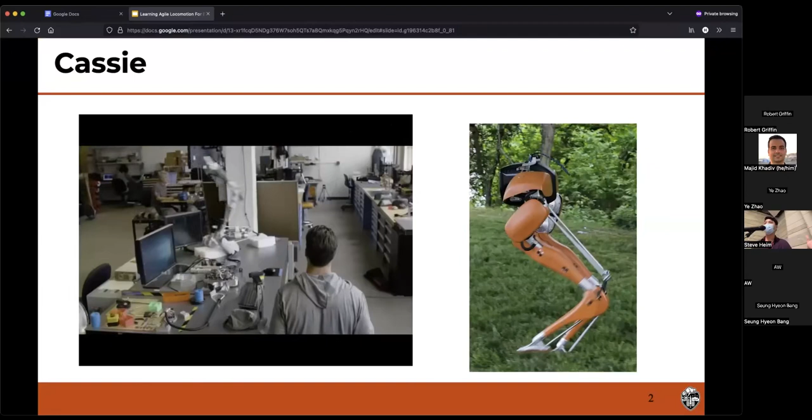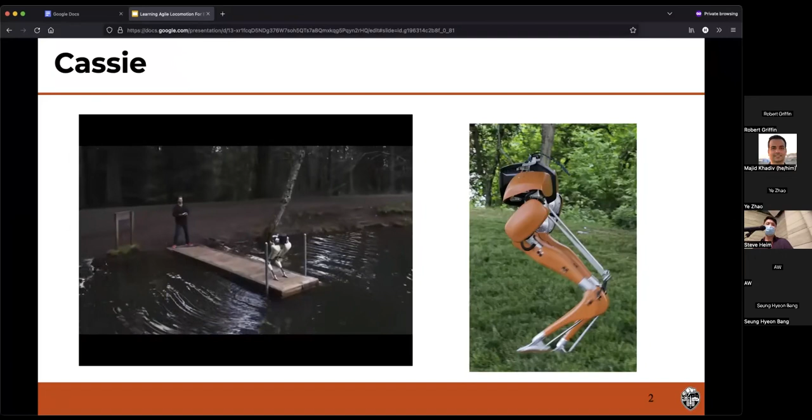Just to provide some context, we're primarily focused on the robot Cassie. It's actually the only robot that we have right now, which is mostly just a pelvis and 2 legs, weighs around 30 kilos, 10 DOFs. We have 5 motors in each of the legs, with just 1 degree of freedom at the toe, and then also 2 springs, 1 at the knee, which is actually hidden under the shell here, and then 1 at the tarsus.

So one of the first questions we might ask is why use reinforcement learning at all, since it's definitely not needed. Cassie can walk and walk pretty well already without learning, using all the model-based and MPC stuff that people have been using for a long time. Using just reduced models, some planning, some optimization, Cassie is perfectly fine walking up these small steps and walking around pretty robustly.

But we like to say that reinforcement learning is really good at getting into the corners of the dynamics. These data-driven methods, through tons and tons of experience, we think can produce much more easily really agile and much more dynamic behaviors. So like a little sneak peek here, Cassie's running at just under 4 meters a second here. We think we'd struggle a lot to get this kind of behavior through model-based methods alone.

So how can we use reinforcement learning? As Zhaoming talked about earlier, we've kind of all seen this general loop of RL, where we have some agent, which is some neural network policy that takes in a state and produces some action that it takes into an environment, and the environment spits back out some reward that tells you how good you're doing, and also a new state, and you keep going back into this loop over and over again. By collecting all of this data, the policy will magically figure out how to produce better actions that get higher reward.

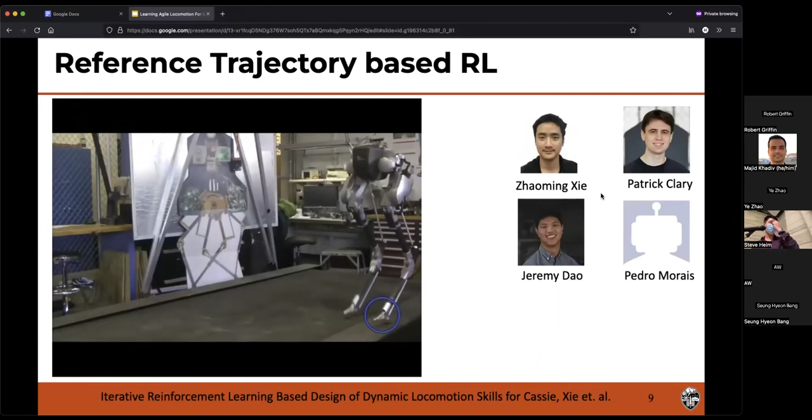So yeah, some of our first work, John already talked about a little bit this today. It was basically first following this setup where a reward function is just to basically at each time step match the corresponding position, full joint position, of the reference trajectory.

And we're actually able to get things to work pretty well. And even though we only have one trajectory for walking at a certain speed, we can actually generalize to walking at different speeds just by sort of stretching or shrinking this trajectory down, which basically means just literally translating the center of mass motion. And so of course when we do this, the trajectory no longer becomes dynamically feasible at all, but that's fine. Even though the feet are kind of sliding along the ground, it's a good enough learning signal that the policy can kind of fill in the gaps, which is another really great benefit of these data-driven methods.

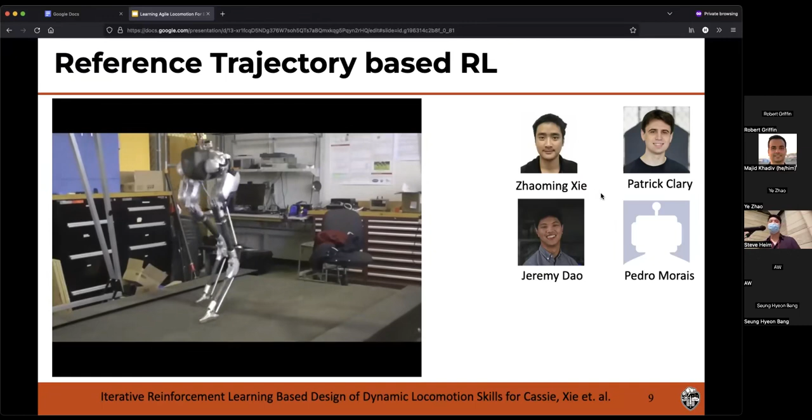And the reward is we basically want to track this reference trajectory. And we kind of take this iterative design approach where you just train a policy, see how it looks. Things are a little funky, so we add some heuristics to make it a little better.

So for example, we first trained a policy to just match the reference trajectory. We found that things are kind of a little shaky, not so great. So we add some heuristics to minimize the pelvis rotational velocity, minimize joint accelerations. And then we found that, okay, that helps, but then now our policy is kind of a little stompy and it makes really aggressive motions. So we had another heuristic to penalize the applied foot force, and then that works.

And then we find that when we do that, the feet don't lift up quite as much anymore, and so now it becomes less robust. So we can add in another heuristic that asks the feet to lift above some minimum height. So this is one of the not so great parts of RL - you're not really always sure what you're going to get. So you kind of have to rely on a bunch of design, but we'll get to possibly solving some of that as we go down.

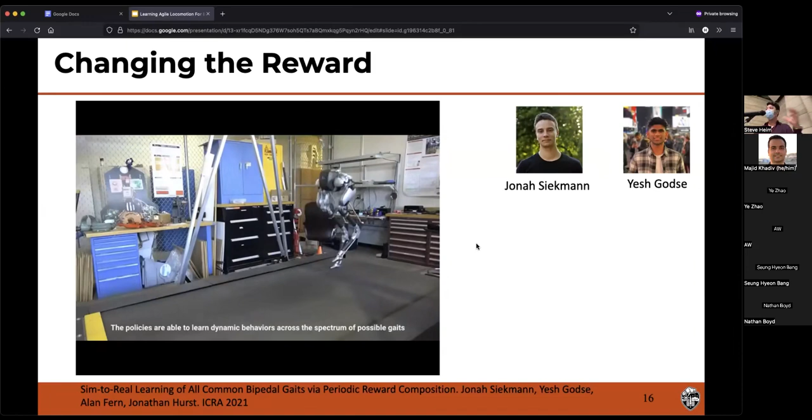So things like the ratio between swing and stance for each foot, stepping frequency, the phase offset between the left and right foot - by just changing all these continuous parameters, we can on the fly command any bipedal gait as well.

You'll see here, Jonah in the background is holding a controller, and on the controller there are some knobs that we use to change these parameters. So we can smoothly transition from walking to hopping to these kind of galloping behaviors.

So now we've changed our reward to no longer be reliant on reference trajectory information. We now have this generic periodic reward that can describe any bipedal gait, based on the timing of rewarding swing or stance for each foot. So we're no longer restricted to just training on walking at different speeds.

We can now train policies that do all sorts of bipedal gaits. Next we looked at changing the task we're training over. Previously all our policies were conditioned on speed, asking Cassie to match some speed like 1 meter a second. But then we were interested in footsteps, so we can navigate difficult terrain and step over gaps. This uses the same framework, but adds an extra reward component that rewards the policy for matching a desired footstep location.

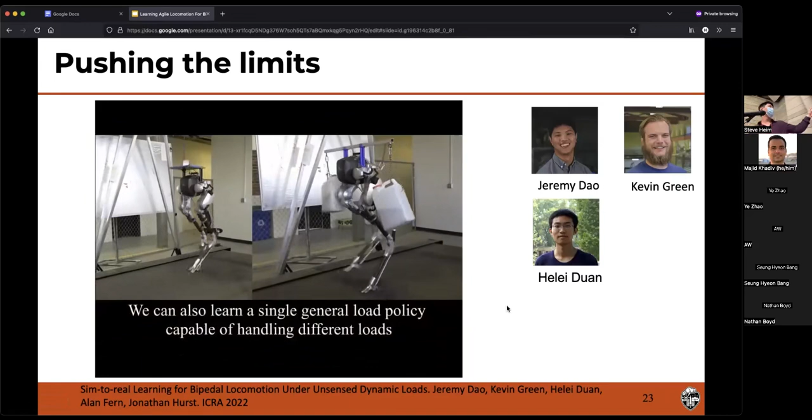We're able to learn policies for each of these loads, both in simulation and then transfer them to the real robot, and it can learn to stabilize even with these big swinging weights on the side. We were also able to learn a single policy that generalizes to all of these different loads. In this video, the exact same policy, the exact same neural network, is used to control both the left and the right, and can handle different kinds of loads.

This is one of the great things about data-driven policies. If you have a new task or some new environment, you can just throw it at the learning, and through tons and tons of experience, it can learn to deal with it.

The other thing we wanted to look at was different terrains, not just flat things but uneven terrains and stairs specifically. So again, using the same learning framework, but now in simulation we show the policy all these different kinds of stairs, and we randomize the width, the height, how many stairs there are, and the slope of the ground after the stairs happen. We find that, amazingly, the policy can handle it. And I'd like to point out that Cassie is still completely blind here. So even though Cassie can't see anything at all, just by experiencing all of these things in simulation over and over, the policy learns to handle it.

Because of that, you'll see it doesn't actually step perfectly on each step. It doesn't step on the stairs exactly like we do, with one foot on each step. It might misplace a step, just get the toe on one or clip a step, and then recover, fall back, readjust, and try again. That's just a product of the robustness that the policy learns by seeing these things over and over in simulation.

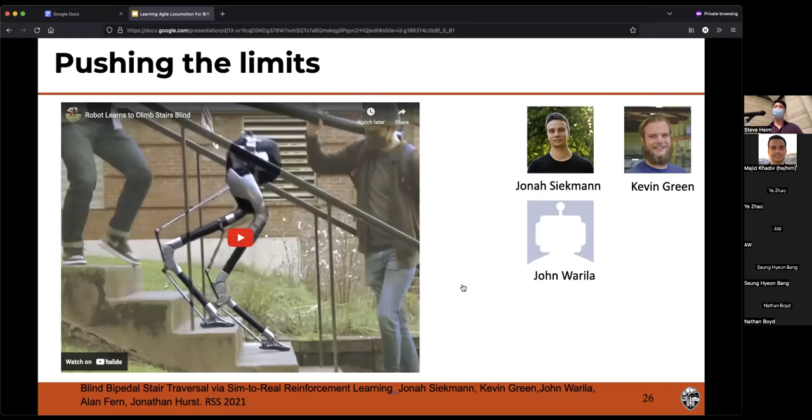And this kind of robust behavior is not something we ever really have to specify. It's just something the policy finds because it's seen it during training and it's always asked to successfully walk up over the stairs. So again, we can get many different diverse and robust behaviors just by throwing them into training, and the policy will turn out fine.

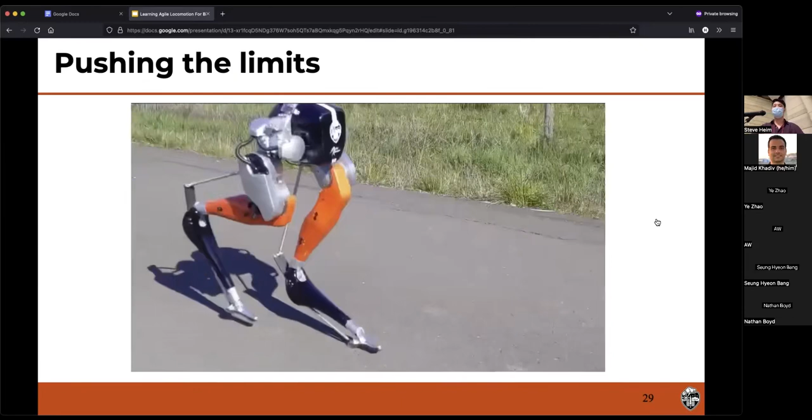Some other really fun things we've done recently, continuing to push the limits: we started thinking about longer term deployments and practicality, really testing the robustness of our policies. So we ran a 5K outdoors. It took us 53 minutes, which is not very fast - I'm sure all of you could run a 5K much faster than that. But it's really starting to show how robust these policies can be, and how practical they can actually be outside of the lab.

Doing this actually raised a bunch of issues and challenges we weren't thinking about when doing experiments inside the lab. For example, we ran into issues with wear and tear physically on the robot. We found that after running the 5K, the feet were completely worn down due to how we were handling impacts and due to the behavior the policy was finding. We never noticed this was a problem indoors, but now walking long-term outdoors on hard concrete, it was something interesting to notice.

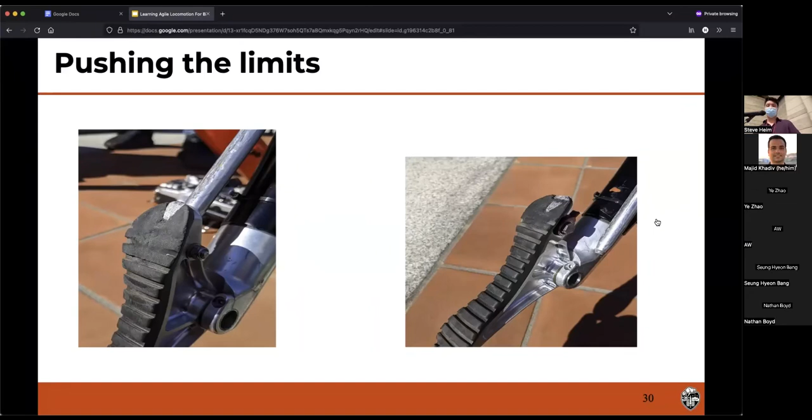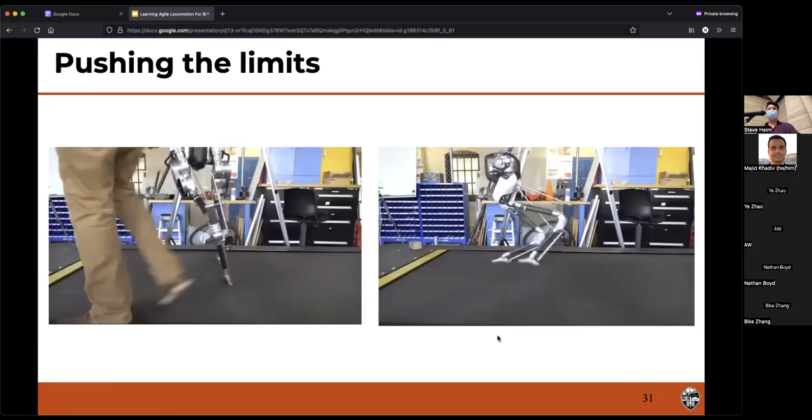We also found we had to adjust our policies to produce much more conservative motions. The general policy on the left, for robustness, produces much more aggressive behaviors, trying to really stick the foot out as quickly as possible to be robust. But that would not handle well on harsh roads over a long trajectory. So we found we had to adjust our policies by penalizing large foot forces, to produce a little bit more conservative behavior, as shown on the right here.

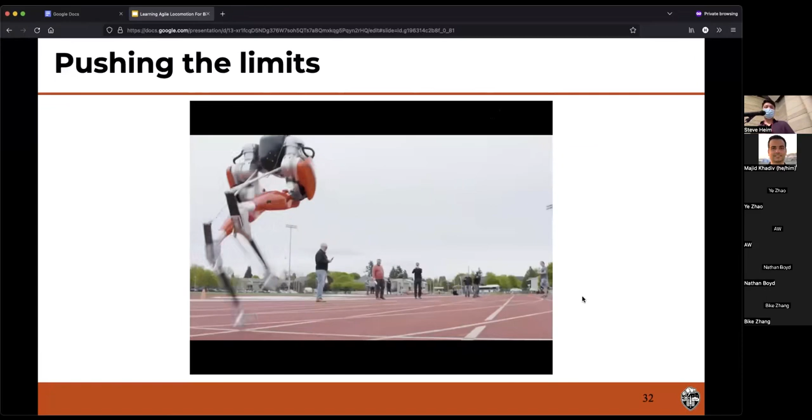Another example of pushing the limits, not on the robustness side but on performance, is we recently set the Guinness World Record for fastest 100-meter dash by a bipedal robot. I think that'll actually be in the book of Guinness World Records soon. This was again using the same training framework, but all we did was restrict the tasks we're training over - instead of training for all bipedal gaits, just train to run really, really as fast as possible. Cassie can run a 100-meter dash in just under 25 seconds, which again is not super fast - we're not going to be beating Usain Bolt anytime soon - but it was still a really great achievement to see, and really fun to push the limits and see how far our learning framework could take us.

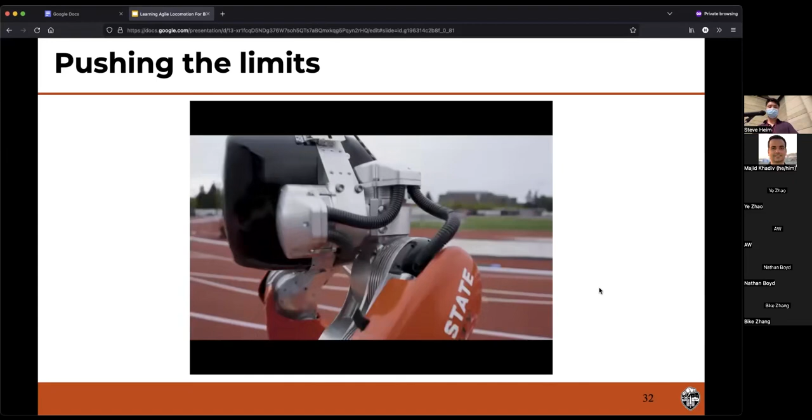They're looking at trying to get more agile motions out of the learning framework. Specifically, we're interested in doing really aggressive turns, so if we're running at speed and I say I want to turn 90 degrees in just 4 steps. We found that this is actually something our learning framework couldn't quite handle. It would either always fall down, or it would turn at a much slower speed, taking about double the number of steps we were asking for.

So we found that we had to turn back to using reference trajectories again. We came up with a single rigid body model and an optimization framework around that to optimize turning trajectories, and then used those to train policies and deploy them on the real robot.

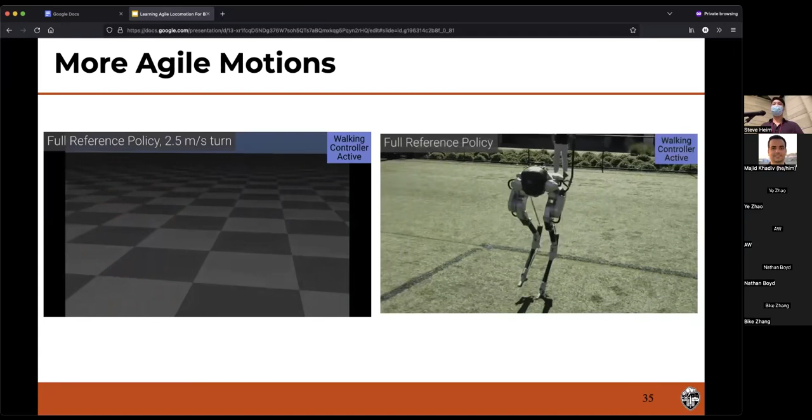So we're still finding out what the limits of our current learning framework are, and sometimes it's not as great as we want it to be. But we're still trying to figure out how we can produce more agile motions.